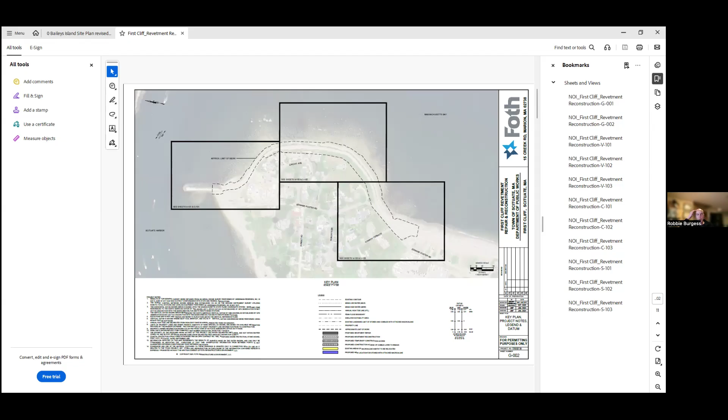So let's see. Brendan? I do not have any questions. Roger? Nope, seemed pretty straightforward. Robbie? I think at the last hearing we saw a plan that showed that laydown area. Is this the plan that replaces this? Okay.

Hold on, one more slide. Okay, and this is where the rev cloud is? Oh, it's been removed. The rev cloud just shows the area removed. Okay, no questions from me, thank you.

Do we have anybody in the audience? I do not see any hands raised. So maybe...

Jeremy or Sean, so removing that area, is there another provision to get this work done? Have you come up with that? We have the southern staging area still, and the access that we have approved does allow us to navigate the shoreline for the entire stretch of the project. It may result in some additional time on the contract, for all that mobilization back and forth. But at this point, as we move forward with the project, there may be opportunities for either the town or homeowners to coordinate with some of the other abutters, and gain access through some of those properties, which we would only allow with the commission's authorization. But for right now, we have the southern staging area, we have access for the entire project site, and so that's what we need to go with.

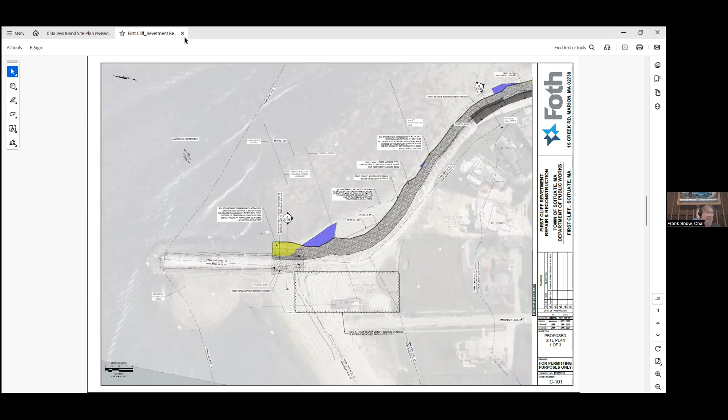Okay, Zero Bailey's Island. This has been continued for a month or so. And who do we have for that team? We have Brendan Sullivan. Good evening. Good evening. Brendan Sullivan with Merrill Engineers and Land Surveyors, here representing the owner and applicant Kathleen Creel, the owner of what's known as Zero Bailey's Island.

We're dealing with Salt Marsh, BVW, Coastal Bank, land subject to coastal storm flowage, which is AE elevation 14, which encompasses a good amount of the property. There is a LimWA located just off site, out in the Salt Marsh area, so none of the LimWA encompasses any of the area you see here. Through Board of Health we performed some perc tests, soil evaluations, determined groundwater, got some perc results, designed a septic system, and are proposing a 30 by 60 three-bedroom single-family home with an attached garage.

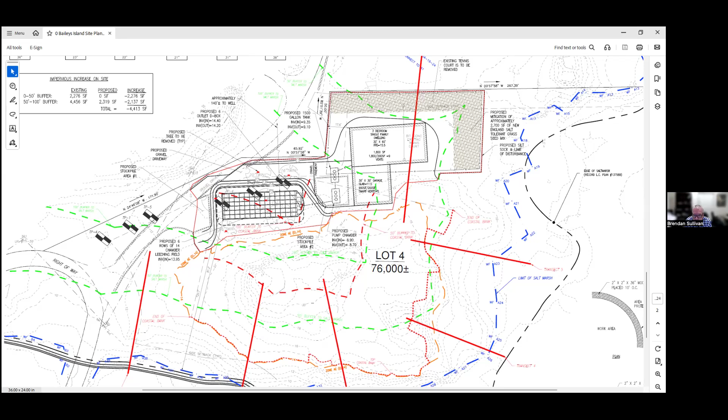The septic design is in Board of Health review right now. We've been through a round of comments with them, they do have a set of revisions, we responded to them a few weeks ago. We did provide some transects, those are the straight red lines you see from what's called the coast to the upland area, which is up in the middle. The lighter orange line around it, that's the AE 14, it kind of goes around where lot 4 is labeled, the 76,000 square feet plus or minus. That's the elevation, the floodplain elevation 14.

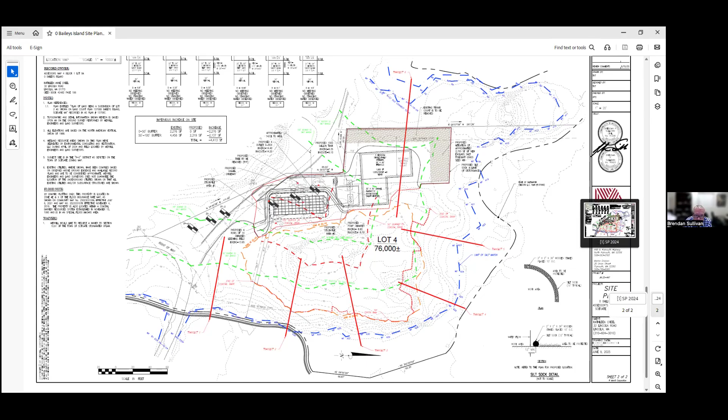We did 6 transects in total to identify the coastal bank. For the most part, transects 2 and 3 were used to delineate the coastal bank. At the top of the page, near where the tennis court is, we have the end of coastal bank, it kind of takes a corner up there. There may be some coastal bank identified on the upper portion of transect number 6, but we don't believe it's significant to the act because there's a 60 by 120 square foot tennis court between the bank and what would be the coast. So we don't believe it provides sediment to the barrier beach or the dune below, not that there is any below that, so that's why we have the coastal bank ending at that point.

We do have the letter from Lucas Environmental, the latest one dated October 7th, they have a couple more additional comments in there that we haven't responded to yet. I just wanted to get the project in front of you guys and see what your comments were, and try to coordinate everybody's comments all in one response and get back to the commission and Lucas Environmental. With that, I'll take comments or questions. Thank you.

Jenn Smith, correct. They're working with Board of Health, and I do think they had several questions they were wanting to have answered. Devin from Lucas Environmental is on the call also, if we would like to hear from her about her comments on this site.

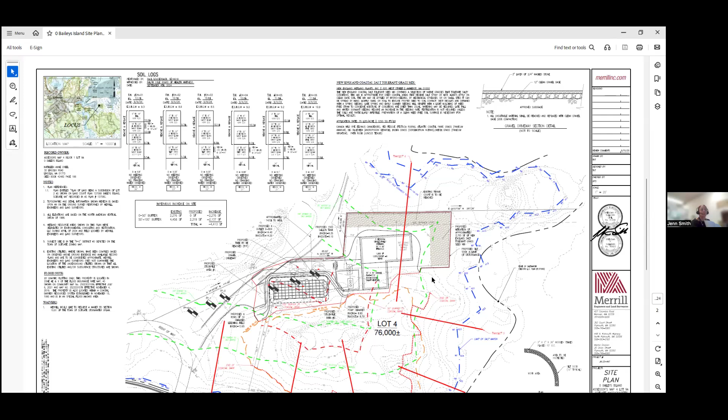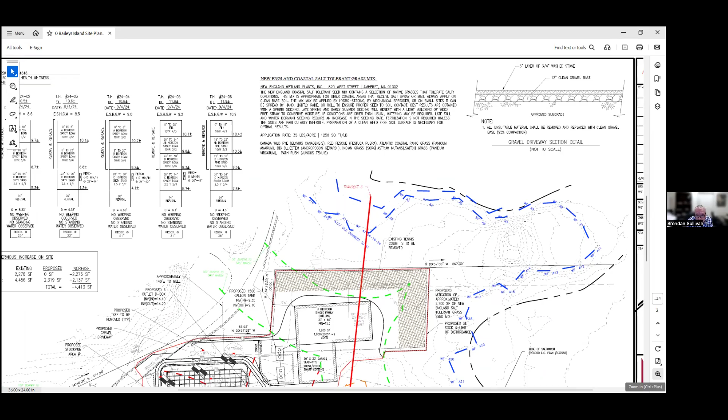One of the responses had to do with the mitigation planting. Is that shown on the plan? Oh yeah, sorry, yeah. So where the proposed house is, that boxed area you see around it is the tennis court. We're taking up approximately 2,700 square feet of impervious tennis court, and putting some salt tolerant grass in there as part of the mitigation. There's an overall decrease in impervious area on the site because of the removal of that area of the tennis court. Okay, thank you.

Jen, Foley? Yeah, I think I'm all set on this one. Thank you. Okay, do we have anybody in the audience? I don't see any hands raised.

All right, I've got a couple of questions, maybe a combination for Brendan and Devin. So I get it that there was a tennis court here, and the condition of that was the asphalt and whatnot was sufficient to be able to call it an impervious area.

It seemed like it had kind of deteriorated. Oh yeah, it hasn't been maintained or played on in quite some years, but it's still a paved tennis court. There's some grass grown up between the cracks, but there's still pavement out there. We did a couple test pits out there, and those areas are disturbed, vacant of asphalt, but that was for part of the permitting process.

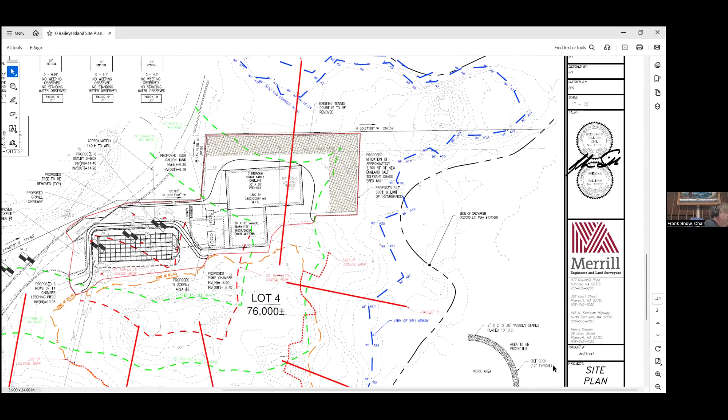And somebody out there with a mower keeps creeping into that. So it's good to have some sort of demarcation. So then I think the suggestion to plant the trees in that area would achieve that purpose, right? Or the shrubs that you're describing.

That's a possibility. So I think we're asking for some kind of delineation between the two areas to avoid regular mowing of the salt tolerant species, etc. Got it. And again, it doesn't have to be a 3-foot post sticking out of the ground with a big sign on it. A lot of these are just small things down low that just denote that.

So I think it would be nice for them to come back with a bit more of a plan to show the trees and show some additional vegetation planted, and think about how they want to do that. To me, that would make the most sense.

Frank, can I ask a couple more questions? I did want to ask, how far does the property line go out into the marsh? I know it goes past the tennis court, but they do own into the salt marsh. Is their ownership off-site from the site map?

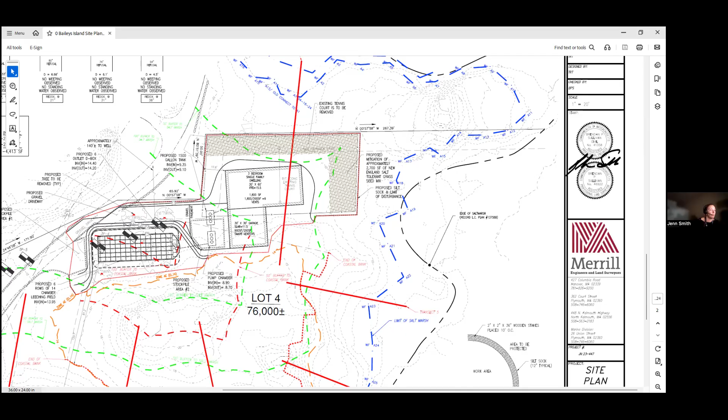My other questions were about some calculations - I didn't see it on here, might be if I missed it, but how much upland is on the lot, and what's the total area of disturbance? I see you have it broken out for the 50 and the 100, but it would be good to have the total for when we're working on other paperwork. Yeah, so that's the impervious decrease on the site.

We had a decrease in the impervious by over 4,000 square feet, but the total disturbance is approximately 15,000 square feet. It's kind of that thin red line that goes around the property and around the silt sock, and then on the higher side up towards the floodplain line. So I think that's about 15,000 square feet total disturbance.

I can get the upland area for you. The upland area is the 76,000 I believe from the land court, which doesn't take into account the salt marsh. So I can get that upland area for you. Okay, thank you.

Does anybody have anything else they'd like to ask or see? We did want to bring to the commission's attention, on the October 7th, 2025 letter, that it appears Brendan and his team will be addressing number 17 towards the end. We just want to make sure there is some discussion on how the commission would like to see the gravel driveway in post-construction conditions. It's our understanding that Two Bailey's Island is currently undergoing construction. I don't know what the restoration plan is for the driveway, but obviously that tracks into the buffer zone and eventually into resource areas. So we left that comment open-ended for you to discuss.

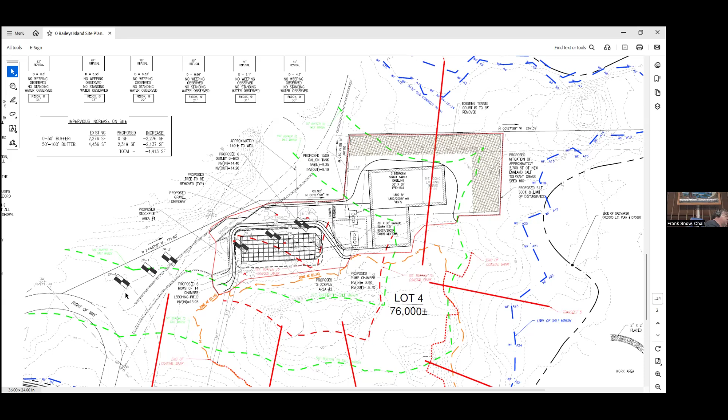That silt sock that's there now is being maintained by number two. I don't think there's a silt sock there now, that's proposed. I believe they have a silt sock once you get onto their property, probably around their property, but I don't think there's any down on this site below. When you're accessing number two, you're driving right by the corner of the proposed septic system. Yes, that is correct.

Anything else, Devin?

I think the only other comment not addressed in this discussion dovetails off what you were just saying, the close proximity of the septic system to the gravel driveway. Obviously you're within inches if you guys have been out there. It's obviously a concern. We just made a comment to see some sort of protection, demarcation, etc. You just want to be sensitive to that area.

Yeah, we can try cutting that grade down a little bit on that corner, because that corner comes close to where we're trying to stay out of the easement, and keeping the lines and grades of the existing gravel driveway the same, since we have to maintain access to the lot beyond us. So we could try to break up that grade a little bit, maybe instead of a 3-to-1 slope, go a small 2-to-1 slope and cut it back with a steeper slope on that corner.

Sure. When I was out there in July, and again more recently, there was a silt sock up against where I think you did some test pits where the septic system is going. I don't know if Two Baileys is maintaining that or what's going on there, but I wanted to put that on the record as well.

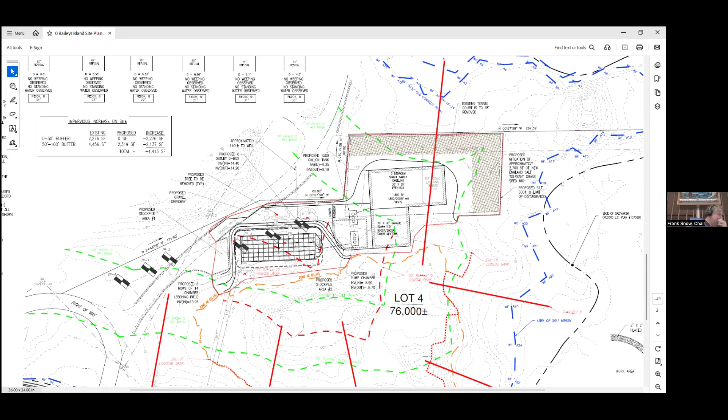Great, thank you, appreciate it. Just maybe make sure Penny's not here for the 17th meeting as well, that'd be great. No guarantees, but... He'll definitely be there now. Just get ready, all right. So we have... thank you, do it, thank you very much. Have a good night, thanks. You too, thank you, have a good night, commissioners.

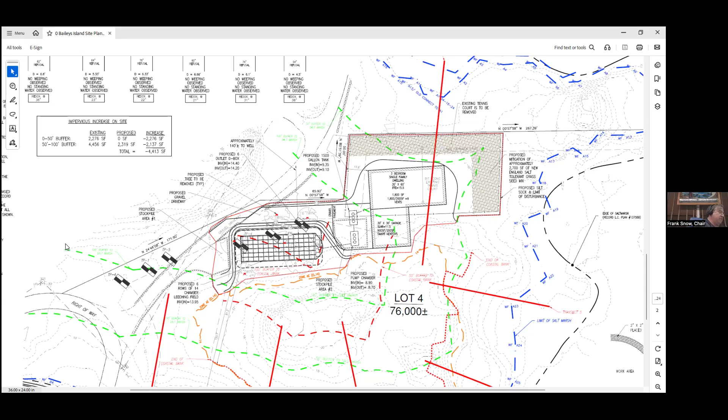Thanks, Devin. So Zero Baileys Island, we want to continue that to when, Jen? The 17th. Okay, got a motion? I'll make a motion to continue Zero Baileys Island to November 17th. That's from Brendan, a second. I'll second that, Robbie. All in favor? Roger, yes. Frank, yes. Thank you.

22 Barry's Landing, hey there's a hand up. I don't know if anybody... Leo McDonough. Do we want to get through our hearings and then we can? Oh yeah, we're gonna finish up these ones first, right? Okay, I didn't know if it was associated with. I think this has to do with Salt Meadow Lane, right, Jen? That's my assumption, but I don't know.

22 Barry's Landing, they also continue, they're going back to want to close with the North River first, so continuing to November 17th. Okay, I make a motion to continue 22 Barry's Lane, Barry's Landing, to November 17th. Motion by Brett, who seconded that? Robbie. All in favor, Roger? Yes. Frank, yes. Okay, thank you.

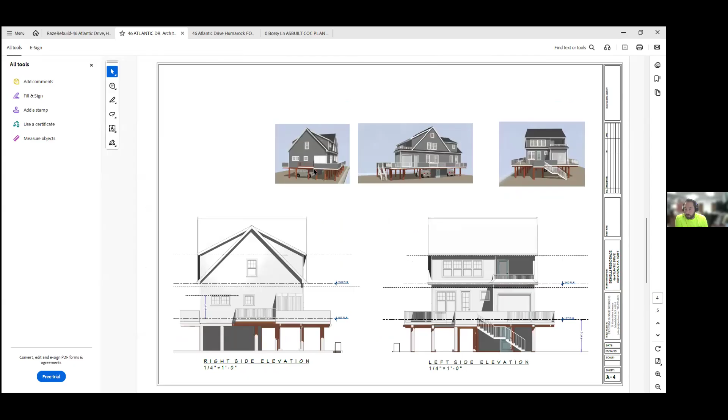What's the enclosure? Can you explain it better? Sure, the enclosure is a concrete slab just to hold in where the bottom steps would go. The walls would be compliant, breakaway or vented as needed. It's just to hold the existing stairway, a mid area between where you'd park your car and where you'd walk up into the building. Currently it is impervious, so it wouldn't be introducing any additional impervious surface.

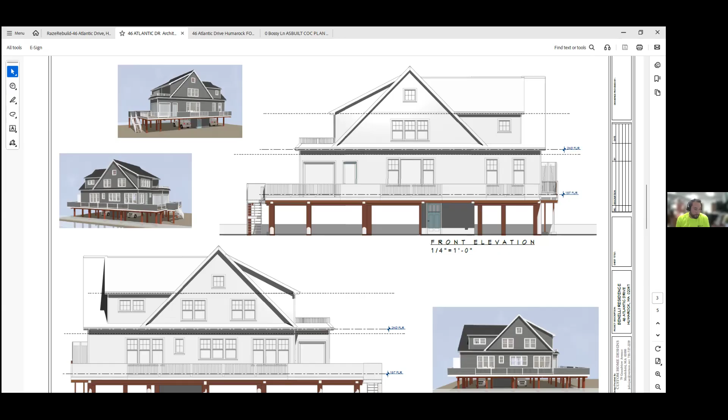I'll have no further questions. Okay.

Robbie? So the remaining area that is not the concrete for the enclosure, what is the surface area proposed to be? As in under the house or under the proposed deck? I guess both. Okay, one second, give me a moment.

Under the house would be, let me see if I'm reading that correctly - yes, 1,536 square feet. And under the deck, which I did not have as a straight calculation since that's pervious area - apologize, I'm talking materials, not area. Oh okay, sorry. The materials, besides the enclosure, will be natural sand, gravel, what's already existing there. It'll be brought back to abutting grade for what the abutter's property is, and the existing elevation around the concrete structure is 14. Thank you.

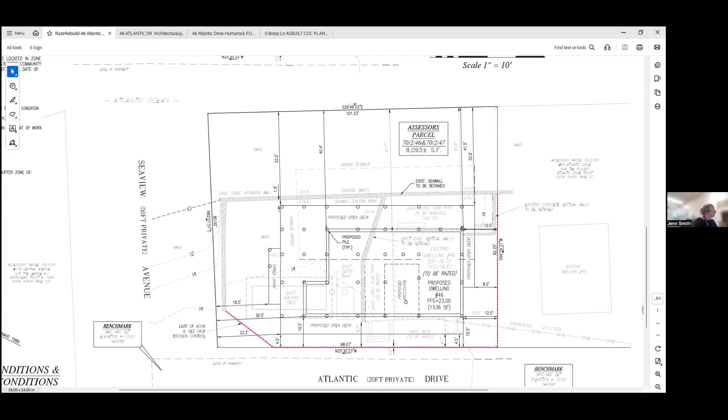Good evening, and thanks for having us tonight. Also with me is Levi Gorel from Woods Hole Oceanographic. And I apologize, I have been thinking this was an in-person, and I had prepared some handouts. So Jen sent you the presentation within the past hour. If you, oh maybe, all right hold on, share that, or I can share my screen if you. Okay, it's short, I have it. Thank you.

While Jen's pulling that up, I'll just introduce both of us. I'm Alex Mansfield. I'm the watershed ecologist for North-South Rivers Watershed Association and the South Shore coordinator for the Mass Bays National Estuary Program. I've been in this position for about two years. I haven't had a chance to meet you folks yet. You probably remember Sarah Grady being in this role for a long time. Oh wow, yeah, apologize for not introducing myself sooner. I think I'm coming up on my two-year anniversary next week.

Levi is with Woods Hole. He designed these systems, and we don't have Sarah Doss with us. She's also with Woods Hole, but I listed her on this presentation because she's a Scituate resident who works for Woods Hole.

I'll jump ahead sort of to the point, and then there's just some information on this presentation. The point is that Woods Hole has developed this new low-cost system for measuring very accurately real tides. So it's a water level logger that you put out to measure tide in real time, and then it has telemetry, so you can see that on a website in real time. They have installed a few of these already in Hull and in Woods Hole, a couple other locations.

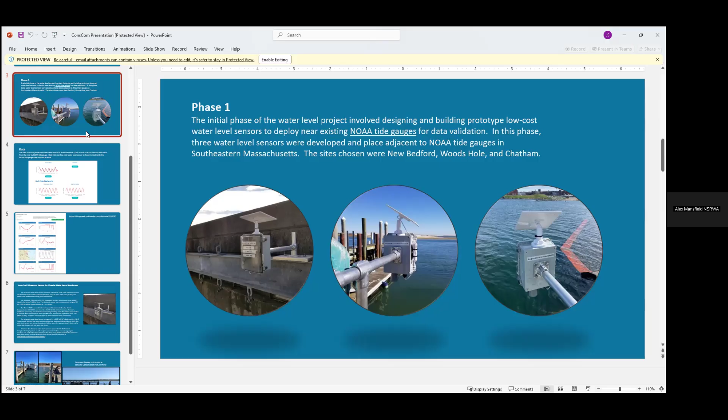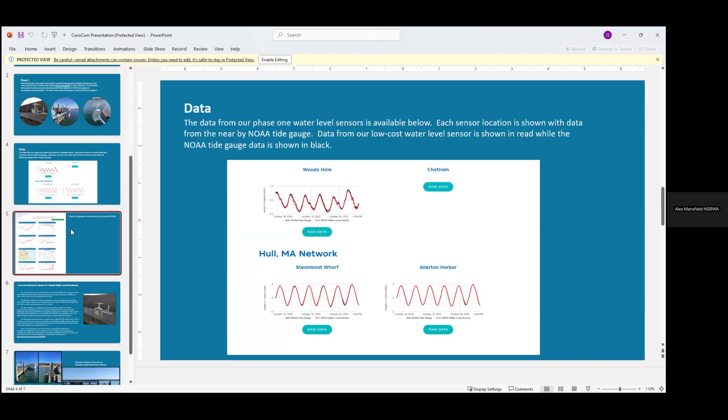These are three different locations. They have a small solar panel, so they supply their own power, and then they have a small chip that serves as mobile data sending, so that you can get real time data. If you go down a slide, Jen, you'll see this is the website that Woods Hole hosts already. So there would be space on this site for us in Scituate. You can go ahead another slide. This is what a single site's page looks like. So you get all this data in real time.

For the Watershed Association, and maybe for the town, it would be really useful to look at how high tide events are changing over time with sea level rise, and especially how storm events are inundating marshes. So we'd be able to get that tidal elevation height for every event, which is really interesting. Woods Hole is looking at this as a big picture to look at long-term changes in both high tides and low tides with sea level rise, especially at specific locations where NOAA is already doing tidal predictions and tide gauges.

This is a lot of technical specs that you probably don't want to read, but if you have questions, Levi can explain that. The last slide has a couple of pictures of the one in Woods Hole, and a picture of the pier you're all familiar with at a very high tide recently.

So we would propose installing this off the seaward edge of the far out end of the pier, so that it can capture as much of the tide as possible. It probably doesn't catch some of the low tide because, as you know, the low lows expose a mud flat there, so we miss a little bit of the water level at the very low tides. But for the Watershed Association, we're a little more interested in the high highs. That's really it in a nutshell, and we wanted to show you that and see if you have any questions.

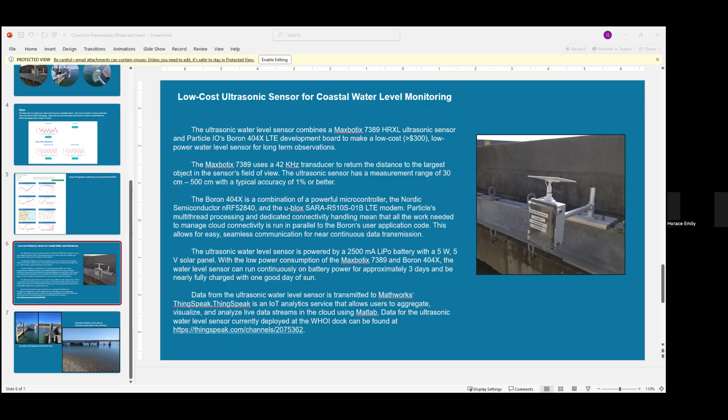We were not quite familiar with how this process works, and we were really hoping that we would have some kind of a resolution tonight, because the project has been delayed for almost 3 years now. We felt it's not really due to us, we tried the best that we possibly can. The proposed change is basically to make the entire project slightly smaller than what was approved.

We will lower it to the requirement from FEMA as of June 2025 when we filed the building permit. Basically, when we designed this new house, literally nobody told us that any even slightest change would trigger a brand new hearing for everything. We thought if you go smaller, it's safe instead of going larger. Even the architect was completely surprised by this.

So we've already requested 2 extensions from the insurance company. We are really, really, really hoping that we can just start our rebuild since the fire. And again, the actual site plan or the floor plan of the entire property is actually slightly smaller.

And the deck is exactly in the same position, except slightly shorter. We're just lowering it to FEMA instead of whatever they requested previously, which I believe they're trying to go above and beyond the seawall height.

Is there any possibility that we can ask the committee tonight to look at it and approve us to build instead of... I don't know if Jen explained to you the process that the commission has.

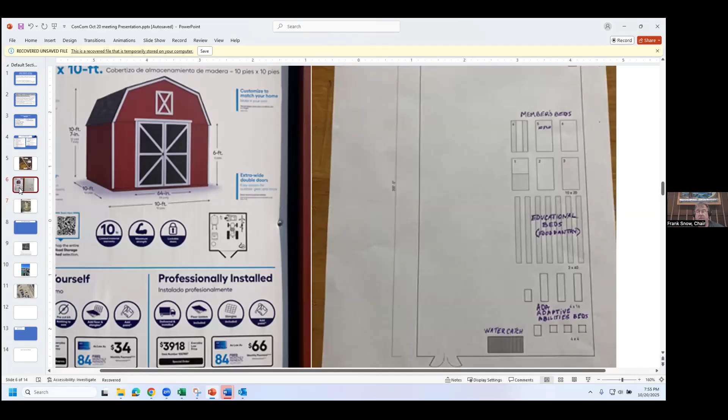I guess that's what they'd like to put there. We've checked - Penny was speaking with Wildlands Trust, who are the Conservation Commission's CR holders for that property, and that's allowable. You can't put large structures on property purchased for land preservation, but we can allow that for their farming use. So they're just asking if they can have that shed on the property. If anybody has any thoughts or comments - yeah, I think this is a good idea for them to be able to securely store their stuff and protect their equipment.

They've made some good strides up there. I think it's appreciated that they've submitted what they've submitted in terms of both the plan, the image that's here, but then also the description of the shed itself. It's 100 square feet, pretty modest. They've been good stewards there, getting a little traction. Had a fun day on Saturday, they collaborated with the Mount Hope Improvement building in the West End, and we had hay rides that went from Mount Hope up into Appleton Field, and folks got off and had an opportunity to walk around the gardens and get some information on possibly having a community plot. I think they've worked really hard to keep improving that. Hopefully somehow we can come up with a way that they can irrigate this, so they don't have to rely totally on rainwater. But they're doing a great job, and a lot of it's educational, and it serves the food pantry. I think we're fortunate that these folks want to use these properties in that fashion. We could support them. It's a good idea.